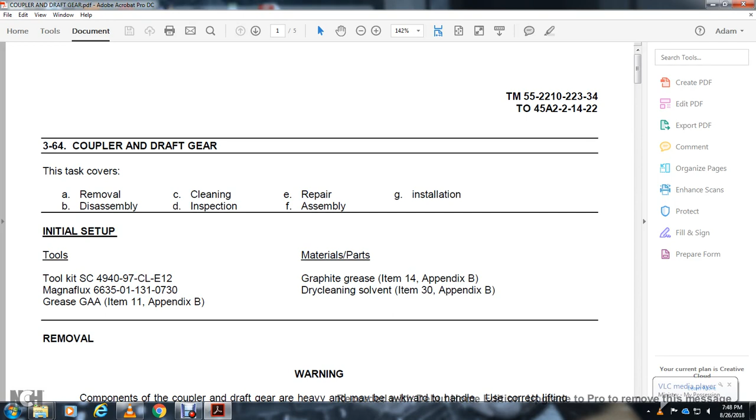Warning: components of the coupler and draft gear are heavy, they may be awkward to handle. Use the correct lifting procedure or indicated lifting device, with assistance from other personnel to avoid injury.

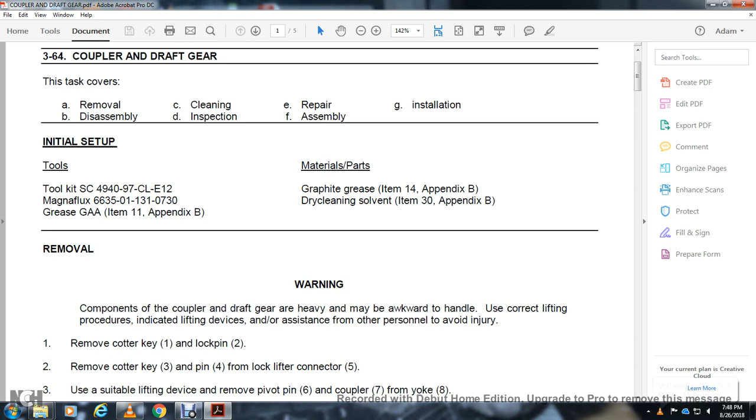Remove the cotter key with the lock pin, cotter key 1, lock pin 2, cotter key 3, pin with the lock lifter connector 5.

Use a suitable lifting device, remove the pivot pin 6 and the coupler 7 from the yoke 8. Refer to paragraph 3-61 to disconnect the sander hoses and sander bracket.

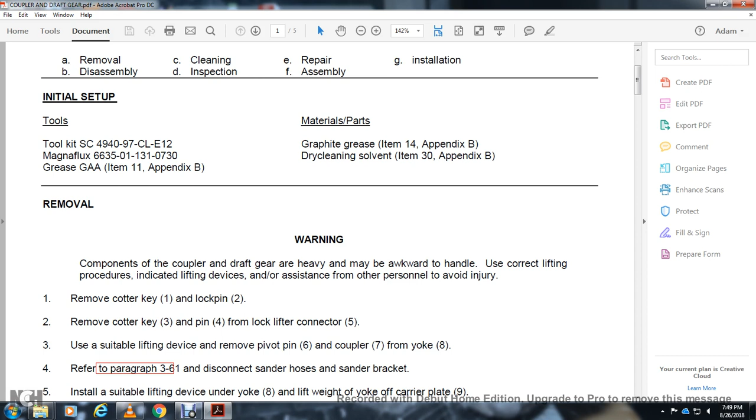Install suitable lifting device under the yoke 8, lifting the weight of the yoke off of the carrier plate 9. Remove the 6 bolts 10 and lock washers 11.

This shows the knuckle pin, draft lugs, and yoke.

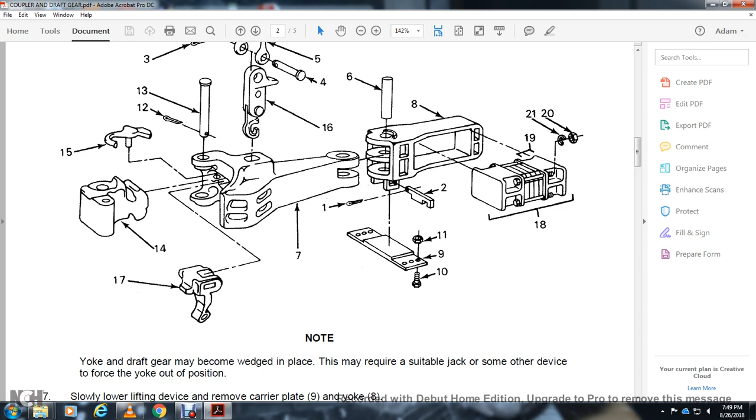Yoke and draft gear may become wedged in place, and may require a suitable jack or some other device to force the yoke out of position.

Lower the lifting device, remove the carrier plate with the yoke 8.

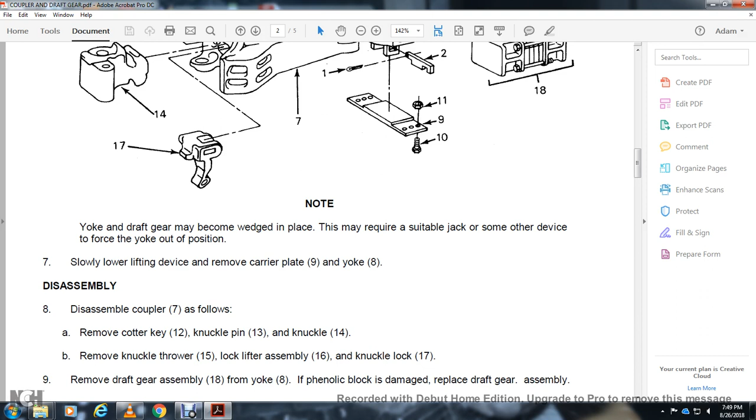To disassemble the coupler, remove the cotter key with the knuckle pin, the knuckle 14, knuckle thrower 15, lock lifter assembly 16, knuckle lock 17, and the draft gear assembly 18 from the yoke 8. If phenolic block is damaged, replace the draft gear assembly.

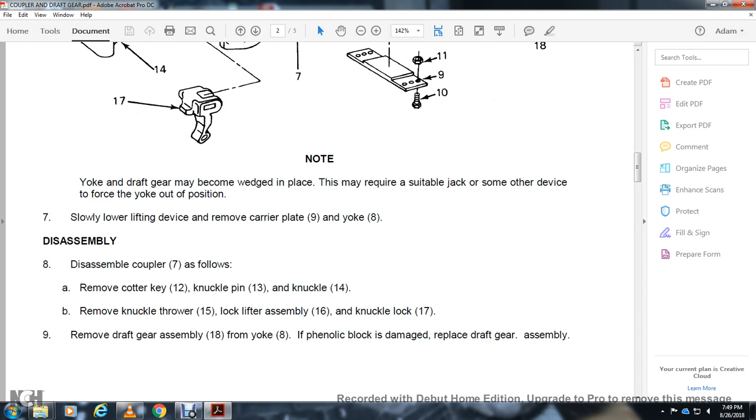Cleaning, inspection, and repair. Warning: dry cleaning solvent P-D-680 is toxic and flammable. Protect yourself with gloves, use only in a well ventilated area to avoid contact with skin, eyes, or clothes.

Do not breathe vapor. Do not use near open flame or excess heat.

Flash point is 100 to 138 degrees. If you become dizzy, get to fresh air immediately and get medical aid. If contact with eyes, wash eyes and get medical aid immediately.

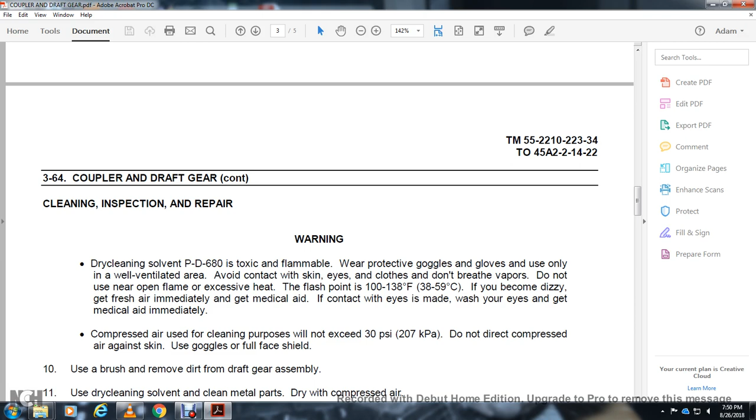For compressed air cleaning purposes, do not exceed 30 PSI. Do not use direct compressed air on skin. Wear goggles or full face shield, use a brush to remove dirt from the draft gear assembly, dry clean, and clean metal parts with dry compressed air.

Cleaning, inspection, and repair of the draft gear assembly: inspect the blocks, check if the frictional material is bonded to the plate, and check if the location of the tabs are intact.

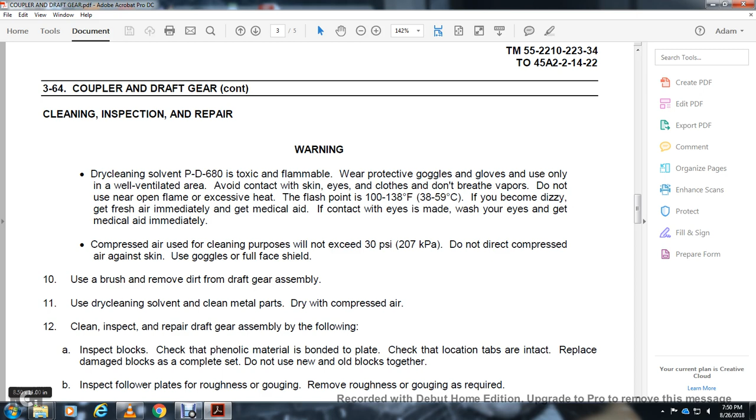Inspect follower plates for roughness and gouging. Remove roughness and gouging as required.

Check the draft gear assembly free state: 1/2 to 3/4 inch larger than the yoke pocket. If the draft gear is smaller than the yoke pocket, tack weld a 1/8 inch shim to the vertical edge of the follower.

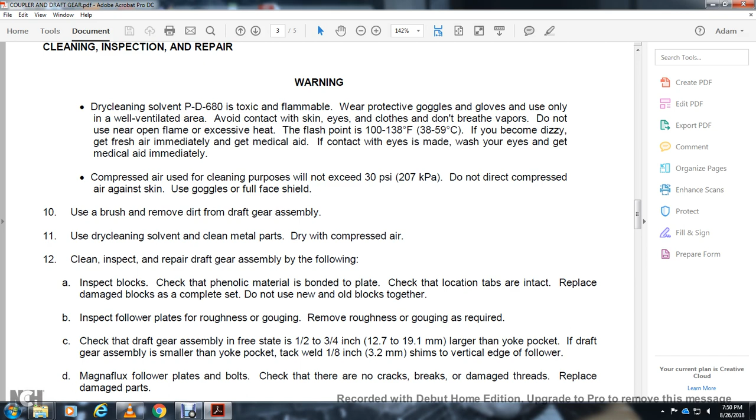Magnaflux the follower plates and bolts and check that there are no cracks, breaks, or damaged threads. Replace any damaged parts.

Inspect the yoke by the following.

Inspect the yoke pocket for rough surfaces. Remove roughness as required.

Inspect the pinhole of the yoke for wear. Diameter of the pinhole: 1 13/16 inch minimum, 2 inches maximum. Replace the yoke if the hole exceeds the maximum diameter.

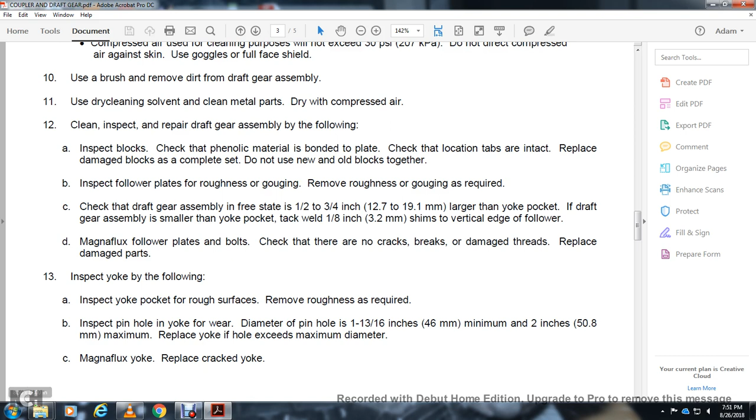Magnaflux the yoke and replace if cracked. Cleaning, inspection, repair: inspect the coupler assembly, Magnaflux the pivot pin, replace the pin if cracked. Diameter is 1 11/16 inch.

Inspect the remaining parts of the coupler assembly for cracks, breaks, and other damage. Replace defective parts.

Inspect the draft gear pocket on the locomotive underframe for cracks or roughness. Remove cracks by grooving, welding, and grinding smooth.

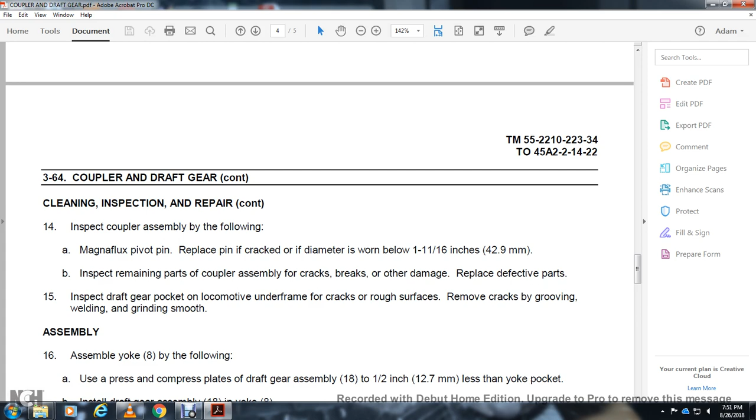Assemble the yoke by the following: use a press and compress plates of the draft gear assembly 18, 1/2 inch less than the yoke pocket. Install the draft gear assembly 18 within the yoke.

Install a 1/2 inch metal spacer on the inside of the yoke against the surface of the follower plate. Remove the 1/2 inch metal spacer between the two follower plates, and secure with 4 nuts and lock washers 21.

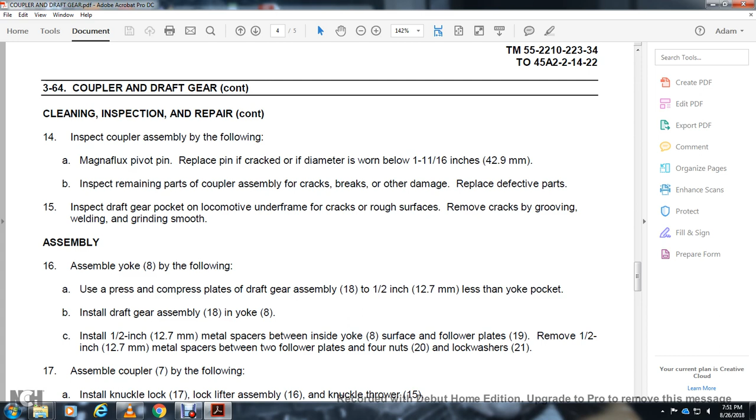Assemble the coupler by the following: install the knuckle lock and lock lifter, assemble the knuckle thrower, install the knuckle, and screw in the knuckle pin and cotter key.

Installation. Warning: components of the locomotive are heavy and may be awkward to handle. Use the correct lifting procedure or indicated lifting device, with assistance from other personnel to avoid injury.

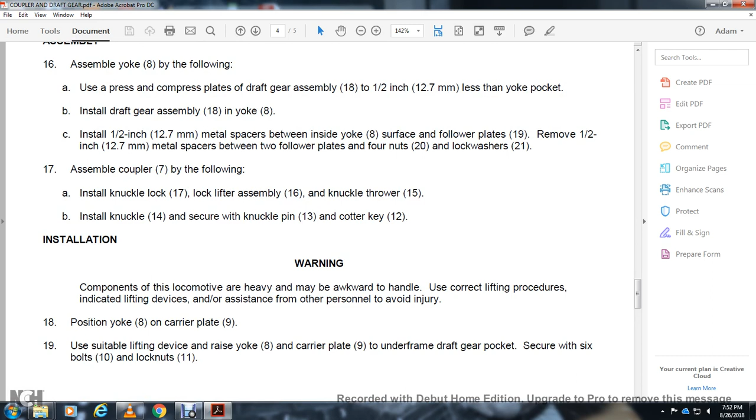Position the yoke on the carrier plate 9. Use a suitable lifting device, raise the yoke with the carrier plate 9 under the draft gear pocket of the underframe. Secure the 6 bolts and lock nuts 11.

Installation. Warning: components of the locomotive are heavy and may be awkward to handle. Use the correct lifting device procedure, indicating lifting device and assistance from other personnel to avoid injury.

Use a suitable lifting device. Install the coupler 7 into the yoke, then screw in the pivot pin 6 and lock pin with cotter key.

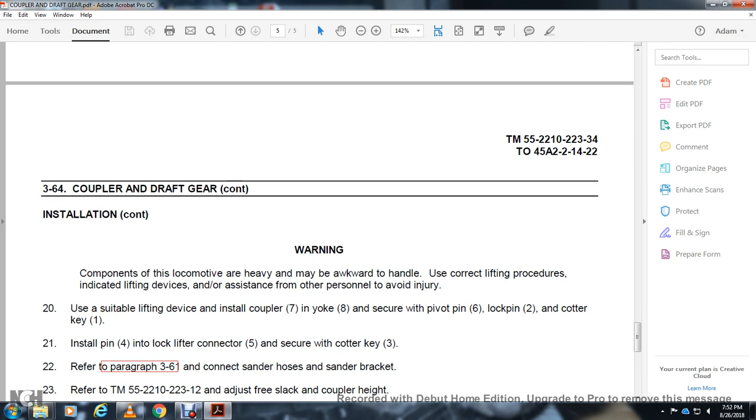Install pin 4 into the lock lifter connector 5, secure with cotter key 3. Refer to paragraph 3-61 for connecting the sander hoses and the sander bracket. Refer to TM 55-2210-223-12 and adjust free slack and coupler height.

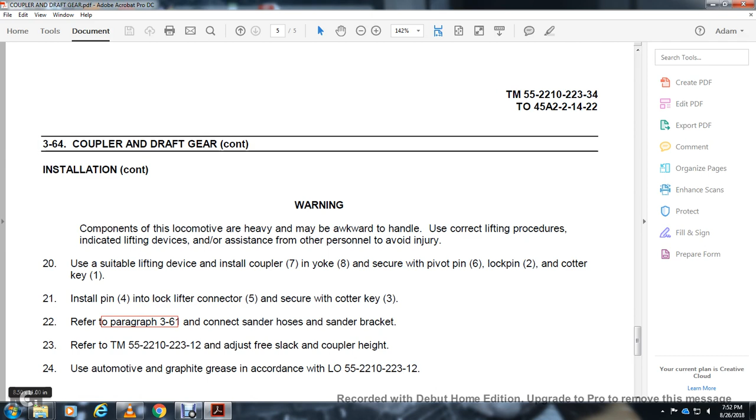Adjusting the free slack and the coupler height. Apply graphite grease in accordance with the lubrication instructions in LO 55-2210-223-12.